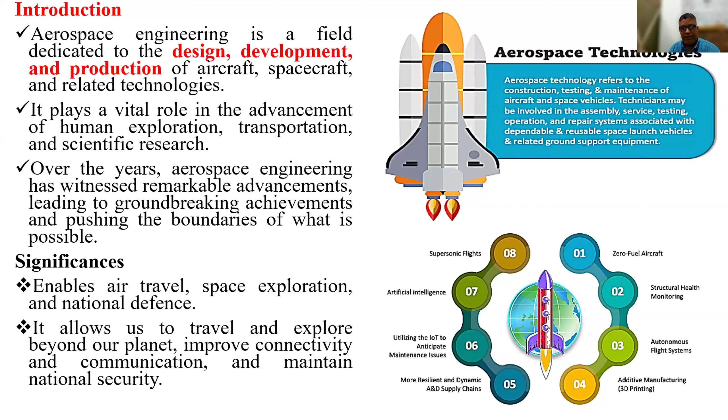Next slide. Coming to the significance part of it, when we consider electric propulsion, that is one area where a lot of research is basically going on. When we talk about propulsion systems, we know about the ionic propulsion system. So NASA's Dawn mission basically utilized ion propulsion to explore the asteroid belt.

Which was showcasing the potential for long duration missions. And when we talk about nuclear thermal propulsion, research is ongoing into nuclear thermal propulsion, which would enable faster travel to Mars and beyond. It looks quite gloomy here where we talk about how exactly it would be done, but these are the recent research work which DRDO is also working on, and ISRO is working towards.

So you could see artificial intelligence and automation coming into account. We talk about autonomous spacecrafts, where AI would be integrated into the spacecraft for autonomous navigation, data analysis, and decision making.

But we need to find some substitute of this fuel which we are utilizing. So we talk indirectly about the renewable energy part also, as well as making the environment more eco-friendly. So this is what we talk about in electric propulsion.

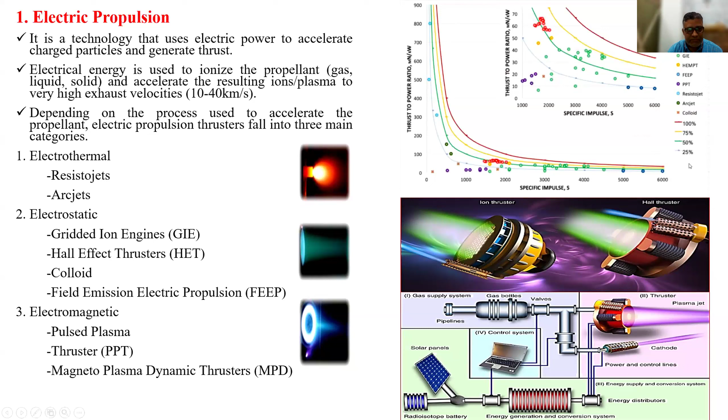Next, and the future trends, when we talk about all these spacecrafts, we have propulsion systems orbiting the satellites, micro, mini satellites, CubeSats. But the only challenge coming along is that innovation is so fast and competitiveness is so huge that we need to talk about manufacturing and how exactly these things will be modified or manufactured in our country.

So we talk more about the requirement of high fidelity numerical models also. We need to design those models. We need to talk about those. And space missions basically require precision, right?

And when we talk about needing this precision, we need high power systems for interplanetary missions and all those stuff. So that is the future trend of aerospace, and it is looking beyond.

Coming to one more year, two more years, in later stages we'll be expecting more towards this research part. So aerospace is more focused on its research area, where bigger organizations like Airbus, or it may be any particular company like Pratt and Whitney, are all landing up in India to take up this particular juncture. So we are involved basically towards these research areas.

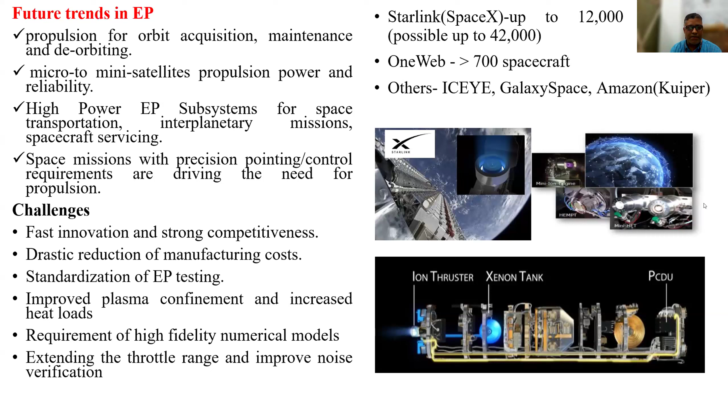Next slide, please. And then looking further at this particular part, this is one area where we talk about reusable rockets. When I'm talking about reusable rockets, we talk about SpaceX, right? You could have heard about the Falcon 9 and Falcon Heavy rockets. They have successfully demonstrated reusability, signifying significantly reducing the cost of launching payloads into space.

And Blue Origin's New Shepard, a suborbital rocket, had successfully completed multiple missions focusing on space tourism and research payloads. When I'm talking about reusable rockets, these are more towards sustainable aviation. We talk about electric aircrafts, we talk about biofuels.

We talk about electric aircrafts, we talk about biofuels, right? So efforts are underway to develop fully electric and hybrid electric aircrafts to reduce the carbon footprint of aviation. And when I'm talking about biofuels, which we've already discussed, research into sustainable aviation fuel aims to provide greener alternatives to traditional jet fuels which we are utilizing today.

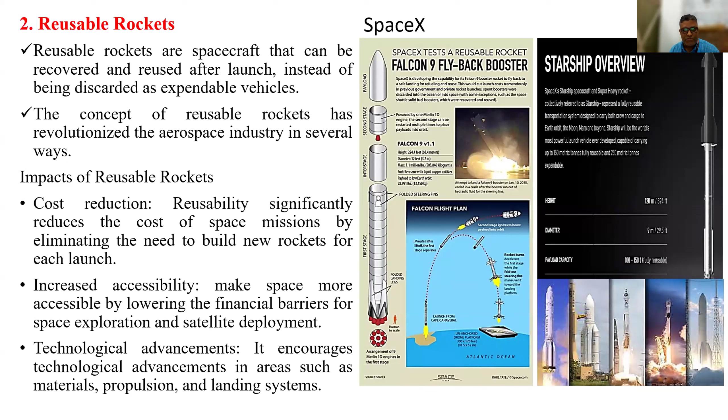And thus promoting space tourism also, considering companies like SpaceX, Blue Origin, and Virgin Galactic, which are pioneering space tourism by offering suborbital or orbital flights to private individuals. Yeah, next.

And then one very important area is additive manufacturing, where we create 3D objects. Basically why? Because nowadays we require this testing to be done. So rapid prototyping is one area which basically accelerates the prototyping.

So if at all I need structural components to be manufactured, either in terms of engine components, we talk about fuel nozzles, turbine blades, or any combustion chambers, additive manufacturing has played a very important role.

And added to that additive manufacturing, if I'm implementing Industry 4.0 technologies as compared to machine learning, AI, or anything, that becomes much easier. So Industry 4.0 technologies have to play a very vital role in the aerospace industry, and rather in any industries we talk about.

But this additive manufacturing has come out as a challenging issue for all these manufacturers, because they get through it. I can do certain kinds of weight reduction and cost reduction into it, but exactly configuring the exact shape and size of that particular object or that part is a bit difficult.

Still, the work is going on. So these are the basic research areas where things are working on to more profoundly.

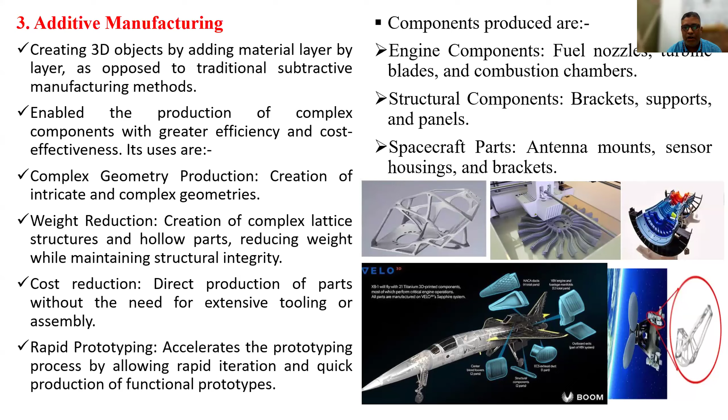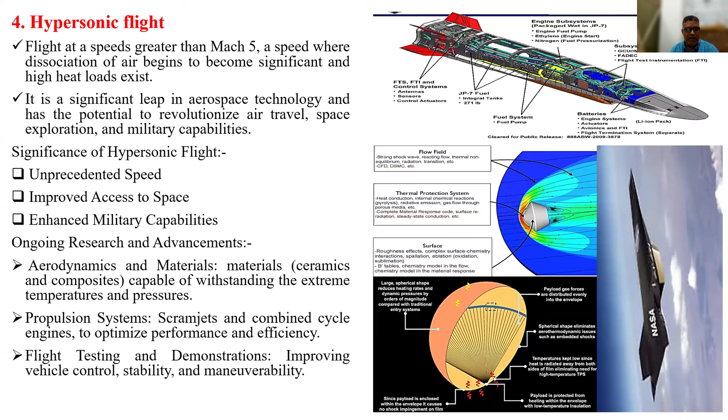Coming to hypersonic flight, this is one area where a lot of research is being done on hypersonic vehicles. There are advancements in materials and propulsion paving the way for hypersonic aircraft, because we need to travel greater than Mach number 5. We need to understand how those materials will come into play, because the same materials cannot be utilized which we are using right now. So aerodynamics and materials will be one area of research, then the propulsion system comes into play, and then flight testing and demonstrations, which will improve the vehicle's control, stability, and maneuverability.

Next, autonomous systems, which I've already talked about with industry 4.0 technologies. When I talk about autonomous systems, artificial intelligence comes into account, because AI is being integrated into spacecraft for autonomous navigation, data analysis, and decision making. These are the autonomous spacecraft being utilized. And robotics like NASA's Astrobee, if you have heard about it, are designed to assist astronauts on the International Space Station with various tasks. So robotics has to play an important role, AI has to play an important role.

All these sensor technologies we talk about—lidar, radars, GPS systems, machine learning—will be into account, guiding human-machine collaboration. We're talking about pilots, operators, and astronauts working in conjunction with autonomous systems to achieve mission objectives, which makes the work easier. These autonomous bodies are equipped with advanced sensors, artificial intelligence, and decision-making algorithms, which are making life easier, and in coming years it will be even easier.

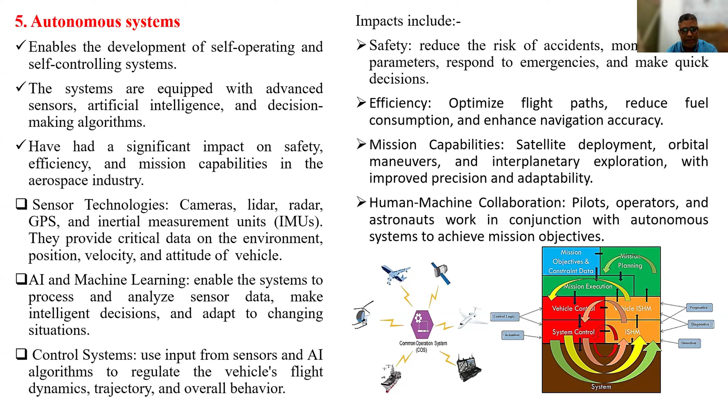Next, space tourism. We have heard about SpaceX, Blue Origin, Virgin Galactic—these have all emerged as a very exciting frontier in the aerospace industry. Tourism in terms of safety and passenger comfort—we undergo rigorous testing in a comfortable environment, then we need to move out of orbit. This is one area that is going to flourish a lot, because space tourism is something people are looking towards.

If I'm talking about space tourism, we need to talk about reusable rockets, which we've already discussed. Reusability and cost reduction across multiple flights is a basic area that needs work. A number of parameters are involved in space tourism, and work is still ongoing as we reach certain conclusions. By the end of two, three, four more years, we'll be talking about that.

So ultimately, to conclude on recent advancements in aerospace engineering: we don't limit ourselves to electric propulsion, additive manufacturing, hypersonic flight, or autonomous systems, but look into continued innovations that take place every day. All this ongoing research, development, and technological breakthroughs require us to understand the challenges, push boundaries, drive economic growth, and further explore beyond.

The future of aerospace engineering relies on the pursuit of innovation—how exactly we are going to deal with the things we encounter. Ultimately, when we consider all these advancements, they reflect the dynamic and rapidly evolving nature of the aerospace industry, which is being driven by technological innovations and renewed interest in space exploration. That's it from my side. Thank you so much, thank you everyone.

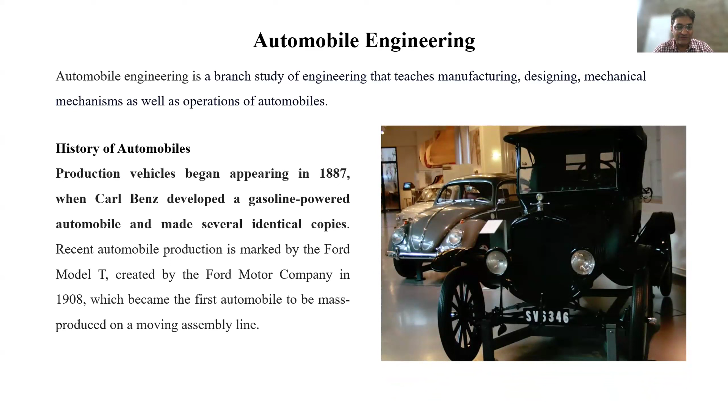If I talk about the history of automobile, it has a vast history. It starts with 1887 through Carl Benz. You might have heard about Mercedes Benz, so it was the same Benz, Carl Benz, who developed the first gasoline powered automobile engine in 1887. That was the first engine which a human has created. Then Ford invented the Ford motor in 1908.

So from the eras, if I go by the eras, it starts with the 17th and 18th century. It started in China, which created a steam-powered vehicle in 1672, but it was just a toy. It started with a toy cart in the 18th century, and then it moved on towards mass production and practical usage.

In the 19th century it was started. We get into mass production, and in that, the US took the lead. In 1871, a steam-powered vehicle was invented by the US.

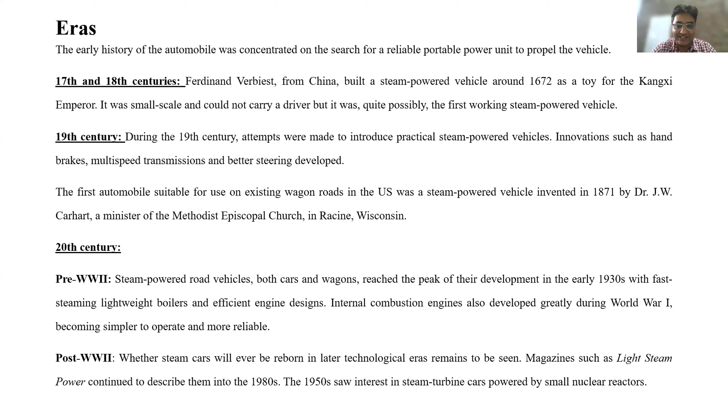During the World Wars, the vehicles which the forces needed were in the form of ICE engines, because they wanted to take various engines, various boilers and all those things from one part to another part. So in the 20th century, during the post-World War and pre-World War eras, other engines were invented in the form of ICE engines.

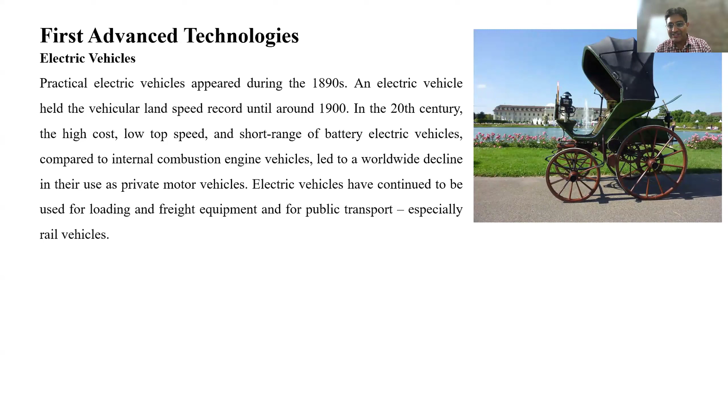Moving on towards the first advanced technology, it was the electric vehicle. The history of electric vehicles started way back in the 1890s. You can see from the image, it was the first electric vehicle which a human created. It's a very simple structure, and the range of this vehicle was very, very less, that's why it was not used in mass.

After that, from beyond the 1900s, mass production of electric vehicles started, but there were so many factors, so many things which the electric vehicles lacked. So there are some advancements which went on after the electric vehicle creation.

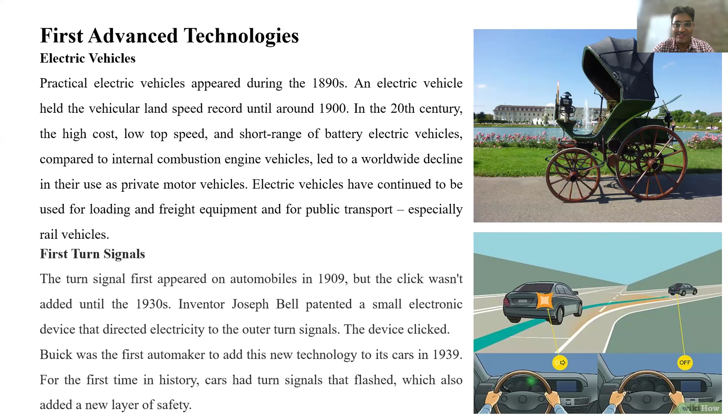The first one was the turn signal. Whenever a vehicle is turning, there is a turn signal which shows to you, so that is the first turn signal we have, in which whenever we are making a turn, the driver switches on the turn signal so that it can ease the other vehicles to see where the front vehicle is going.

Then there are so many advanced features: the blind spot advanced feature, the reverse assistant feature. These are features which are in the high-end cars, still at the higher range. If I go by the blind spot information system, this system is designed for high-end cars like Volvo and Mercedes.

Whenever we are driving a vehicle, there are some areas where we cannot see. Suppose a vehicle is coming from the back end, there are some areas which a driver cannot see. So this is the blind spot information system, which is integrated with various sensors so that you can see from where other cars are coming from behind.

Then the reverse assistant system, it is there in BMW and in Mercedes also. Suppose you get stuck in traffic and want to take your vehicle back, by switching it on, the vehicle will take the same path from where you have come to that point. That is the reverse assistant system, used in various BMW cars, Mercedes cars, Volvo cars, and all the high-end cars.

The adaptive cruise control is there in all vehicles nowadays. The driver can just switch on the cruise control and the vehicle will modulate the speed, modulate the throttle and everything, and it works on its own.

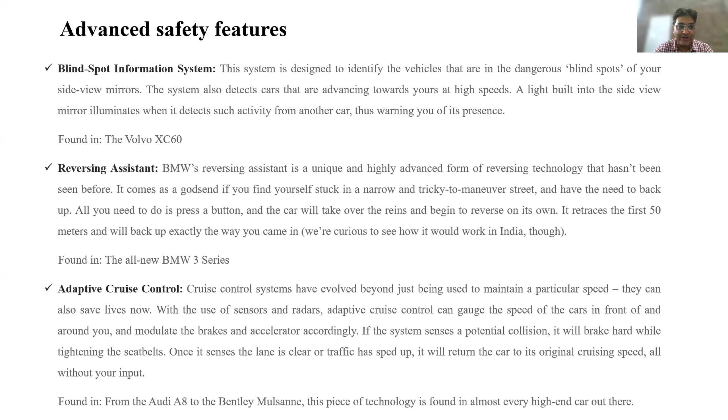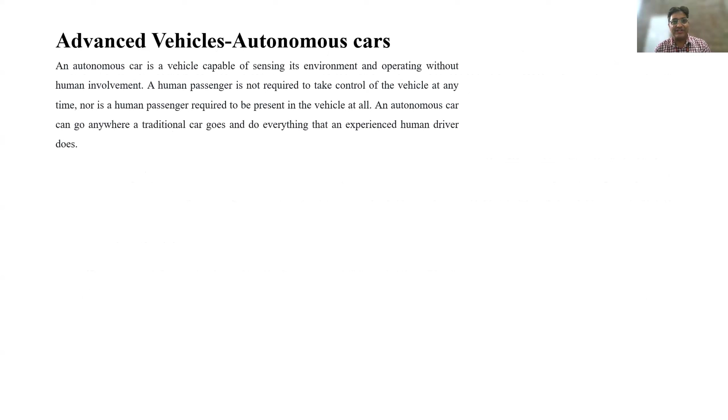Now coming towards the autonomous car, it's a big thing going on nowadays, and it is already in production in US and Canada. Autonomous cars are cars which generally move on their own, and there are many different arrangements in autonomous cars also. But there are so many factors which need to be looked upon.

If I talk about the weather conditions, suppose the front glass is covered with snow, or we can say covered with rain. So what will happen to the cameras and sensors? We need to look upon it.

The accident liability, because nobody is going to take the liability of the accidents which are going to take place due to this. Who can be liable for accidents in these cases? The manufacturer, the human passenger, or any other. So the thing is, who will take the accident liability? We need to see upon this.

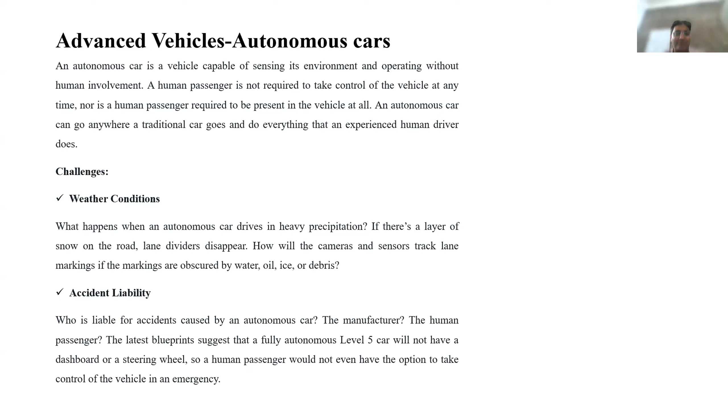Now coming towards artificial and emotional intelligence. Over here in India, we have a non-verbal communication with other passengers also. Suppose one driver is coming from the front, we are in a state that over here in India we can read the eyes of the other driver, what he's going to do. So the thing is that emotional intelligence is still greater than artificial intelligence.

Still there are so many benefits of this. It reduces congestion, cuts transportation cost, improves walkability, and all those things. But there are 6 levels actually, and we are happy with level number 3 in this.

What are these levels? The 0th level is no automation, everything is manual in the hands of the driver. The first level is driver assistance, in which the vehicle can assist the driver with a single automated system, let it be cruise control, traffic mitigation system, and all those things.

The thing is that we are in a state in India, if we want to bring this autonomous vehicle into the park, we need to have the second level first, and then we need to proceed further, because there are so many factors in India, the traffic system, the light system, and all those things. So we need to start with this third or second part first, and then move forward, because the roads are not that smooth over here.

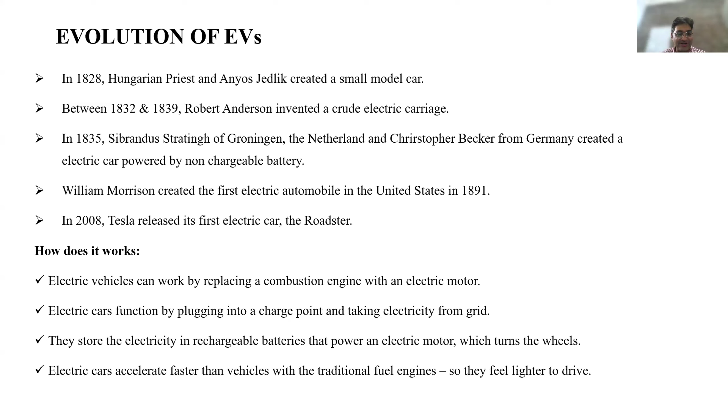Okay, then the advantages and the challenges. EVs are easy to recharge. EVs are recharged by electricity, so there is no need to buy any gas ever again - it's just the electrical switch required to charge the EV. There is no emission, which I told you earlier, and there is very little noise pollution also. Suppose anybody is driving the electric vehicle, the sound is very, very less. The noise is very, very less.

Challenges - recharge points are very less. Suppose you want to go to some other place where charging stations are not there, then what will you do? The range is less, the charging points are less, and it is still in an expensive state because mass production is there, but not that much. So the thing is that it is expensive and common people cannot afford it.

But still we are having EVs in the range of 13 to 15 lakhs. But still it is in the higher range. If I go by IC engine vehicles, generally many vehicles have a range of 4 lakhs, 5 lakhs also - still not in the reach of normal people. EVs are much more expensive.

Top speeds are very less - and it's a good thing actually. Top speeds are very less, so accidents will be less. So we cannot take it as a challenge, but still...

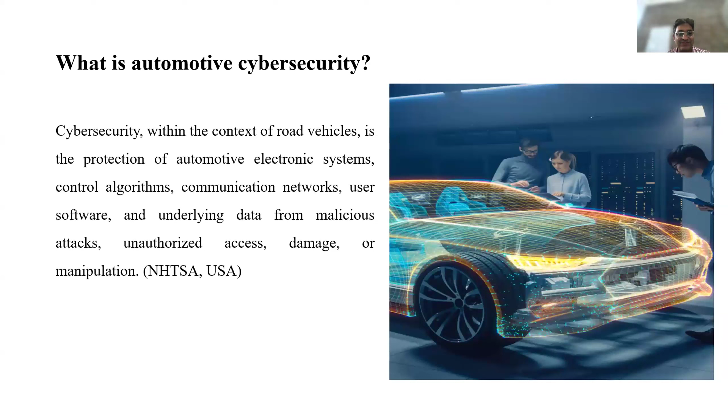Now, what is automotive cybersecurity? Cybersecurity is very much needed, because if everything gets automated, it is very likely that your personal information would be lost. There are so many viruses, so many things which can damage your security. So cybersecurity is one of the most important things which needs to be looked into for autonomous vehicles.

Moving on towards cybersecurity in vehicles, there are so many things we need to predict, detect, prevent and respond to. If I talk about two vehicles - electric vehicles and autonomous vehicles - both are very good. If I talk about the autonomous vehicle, one of the most important things is cybersecurity.

The other thing is that if we need to store the data, we need a very high range of storage. Let me give you an example - if I want to store the data of, let's say, 300 autonomous vehicles, it requires more than 1000 GB of space, which is very, very high. So these are the two things which are stopping us from going into autonomous vehicles, and plus the cost is very, very high.

We can proceed towards autonomous vehicles, but still a lot can be done in case of cybersecurity, in case of mass production, in terms of the cost of it, and all those things.

Talking about electric vehicles, the ranges are less, and charging points, electricity cost, and all those things need to be taken into account. But still, if I go by the vehicles, we will find electric vehicles reaching mass production at a faster pace than autonomous vehicles. In India, autonomous vehicles are still at a very raw stage. It has to be done at a mass scale, and it needs to have good cybersecurity and all those things. So that is it from my side.

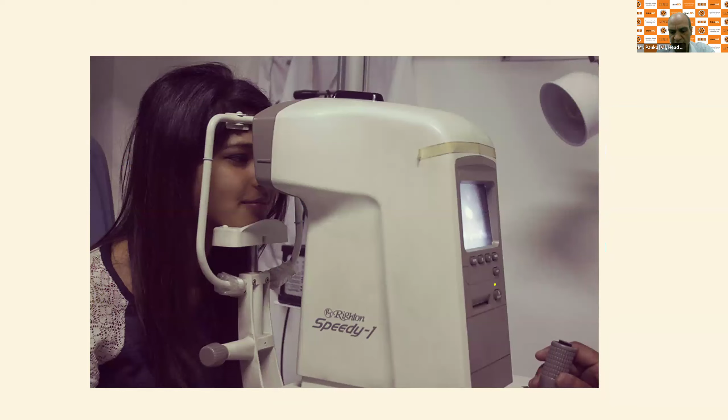God forbid any student falls ill, but if a student falls ill, then we are ready with a hospital within the university. It's a 25-bed hospital with resident doctors, medical staff, support staff, and even a dental chair for the students' disposal. We have got an open air theater.

Talking about sports, we don't only create researchers or academicians, but we also create sports people of repute. For that, we have got a very, very good sporting facility within the university campus.

Students coming from outside, from other states of India, even other parts of the world, they stay in our hostel premises, and we have got a capacity of 25,000 students in a single go that we can accommodate.